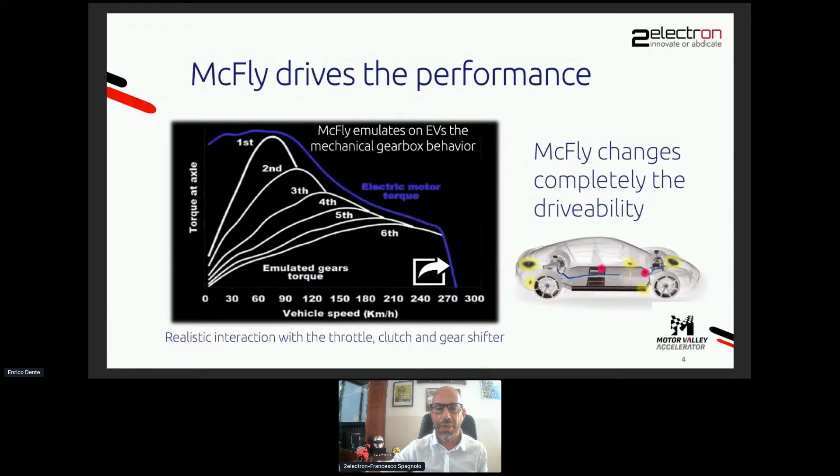Today we have our controller and real-time software engine cross-platform, international IPR, and the 2-wheel POC Emula already track tested. We are looking for tier 1 industrial partnership, networking, and seed investment. Our short-term goal is to produce 2- and 4-wheel street-legal customer POCs. In the medium term, the pilot project in an industrial environment, SIL assessment, and homologation.

I want to leave you with this final thought. People who love to drive need emotion. We are a Motor Valley Accelerator company that thinks about sustainable mobility, but with a big smile.

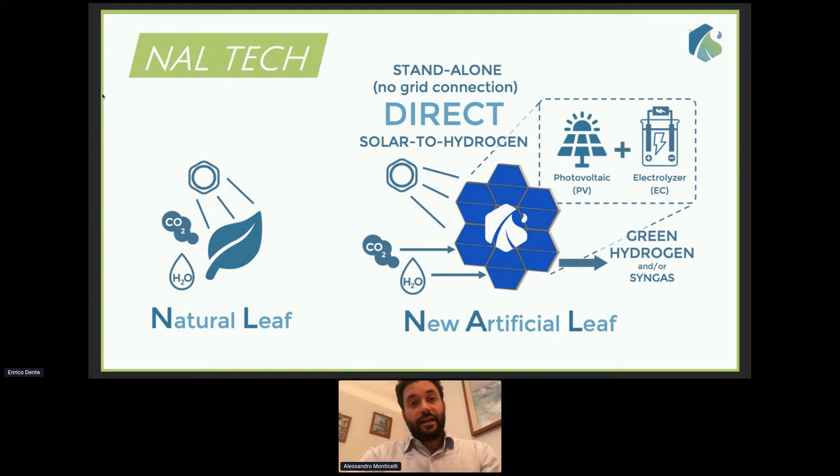Next slide, please. So what are the three main features that we have in our technology compared to the other ones? We do, as I said, direct green hydrogen. We have secondary products such as the recycling of CO2 emissions, and we are a standalone device that can be applied where photovoltaic panels and electrolyzers mixed together cannot be installed.

Next slide, please. So we basically solve the two main problems of energy in just one device. We solve solar intermittency through green hydrogen storage, and CO2 emissions with their recycling.

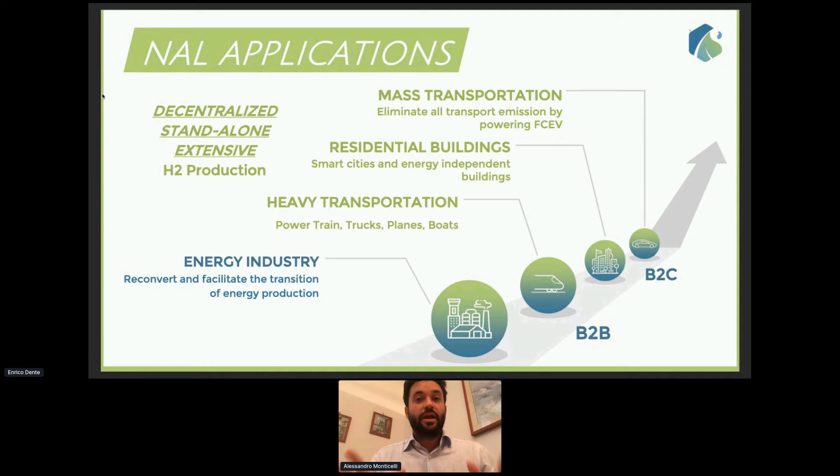Next slide. Our application starts from the B2B market, so from the energy industry. We take the energy industry and we renovate the existing infrastructure into green ones without destroying them, and we can move also to B2C markets such as transportation, residential buildings, and mass transportation, all because we have an unfair advantage, which is the fact that we are a standalone and extensive solution.

Next slide, please. So we can be integrated along parking lots, refueling stations, naval docks, railways, and gas pipelines. That's our unfair advantage. Next.

So what about our technology? We started at University of Illinois in Chicago with a POC. Then we moved on to Polytechnic of Turin with a functional prototype. And with the support of SNAM, we validated our technology at TRL5. And now we need to move on and reach a 15 to 25% solar-to-hydrogen efficiency and a levelized cost of hydrogen of €2 per kilogram of hydrogen produced. This is our goal. This is the next 2.5 years in front of us.

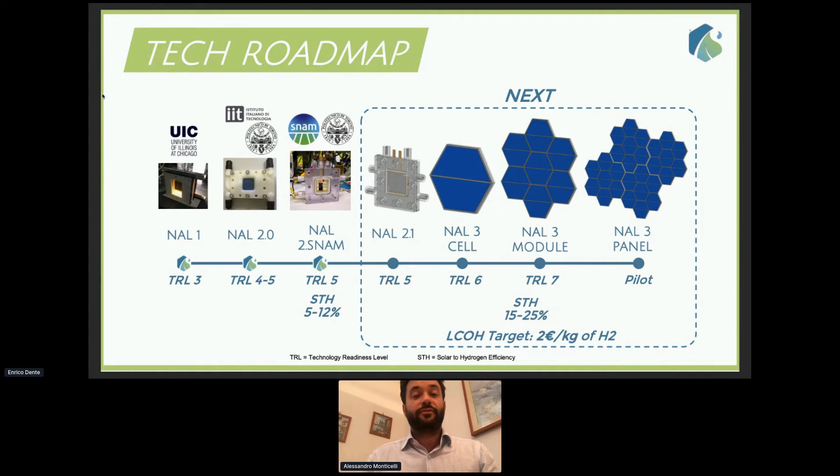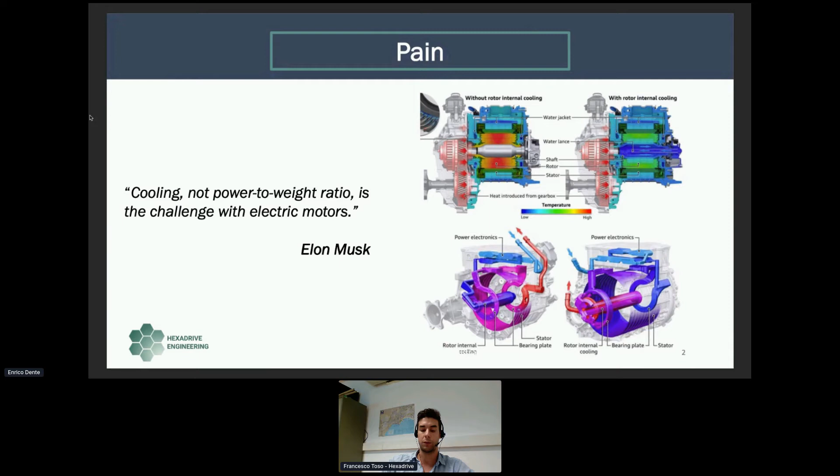Further, to develop semi-reliable thermal models, standard techniques require a lot of time, high-skilled personnel, many commissioning experiments, and multiple thermal sensors implemented in the stator, which increase manufacturing costs. Next slide, please.

HEXADRIVE digital twin technology outperformed the state of the art. We introduced MotorTWIN, a software to quickly and automatically develop digital twins of electric motors. Our software uses a hybrid approach, both based on physics systems and artificial intelligence. It's an easy-to-use product whose digital twins are characterized by unprecedented real-time model execution speed, holding a high level of accuracy.

Next slide, please. Once created and connected with the real motor, the digital twin enables the following disruptive features. First, you can use it in a simulation environment, testing your virtual prototype with many different drive cycles. Then, once your design is complete, you can deploy the digital twin directly into the embedded hardware which controls the machine. This allows implementing model predictive control for optimizing the cooling system and monitoring the rotor temperature in real time using the digital twin as a soft sensor, decreasing the number of sensors needed in production.

Here we have a practical example of our demo showcase. We use digital twin directly at the electric motor drive level. So you can better estimate in real time the torque, run the motor cooler, and save up to 14% of the battery, extending the range of the vehicle without any additional hardware. Next slide, please.

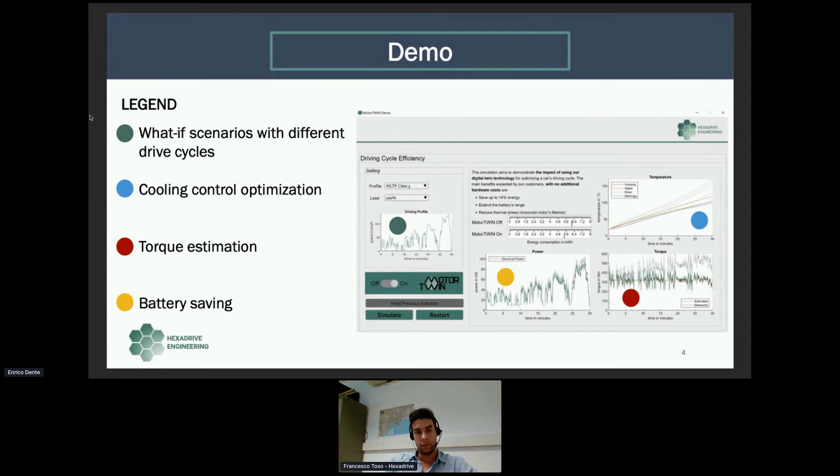Make HEXADRIVE your industrial partner to explore the world of digital twin. Thank you for the attention.

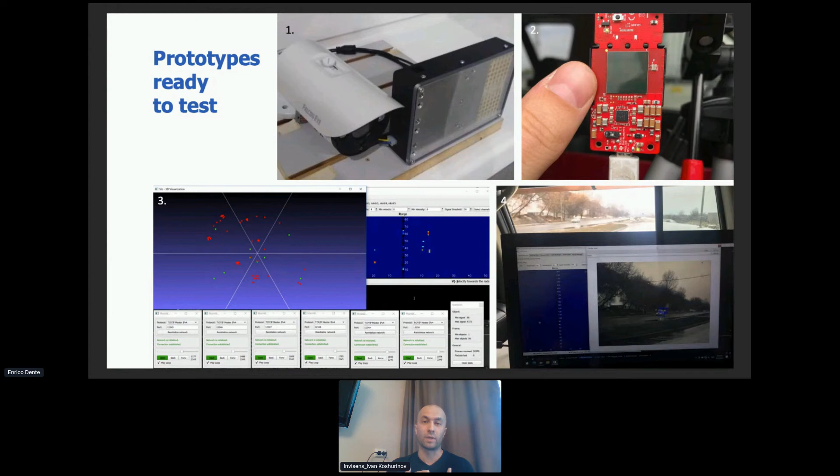Next, please. As you see, we are focused on the low-level software, but able to build the entire radar and ready to start pilot projects this year. Please reach us if you are a Tier 1 or Tier 2 OEM supplier to know how your ADAS system can benefit from low-cost radars. Or if you are a sensor fusion or radar developer focused on high-level processing or radar architecture in general, we can collaborate. Let us suggest the data acquisition and processing pipeline that fits your approach. Looking forward to hearing from you. Thank you.

Thank you, Ivan. So I see one question here. Who are your more direct competitors?

Oh, thank you for the question, love it very much. In fact, I'm doing an annual radar startups review, and there are more than 25 radar startups in the world right now. I'm publishing it to the Microwave Journal. Speaking about the approach, I know no companies that are focused on this particular niche of low-level software. For example, companies like Uhnder or Arbe, they are developing state-of-the-art hardware. Or companies like, let's say, Zendar or others, they are focused on AI processing. I cannot tell you the exact company that is focused on this particular niche of low-cost applications. So I was trying to find it for more than 5 years.

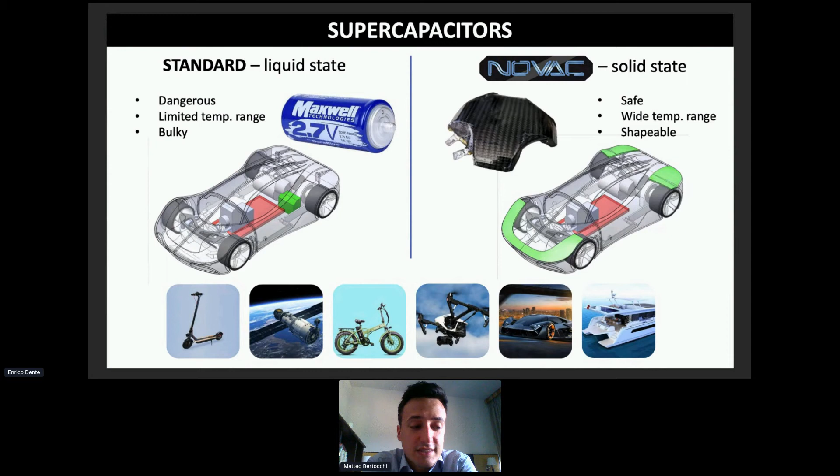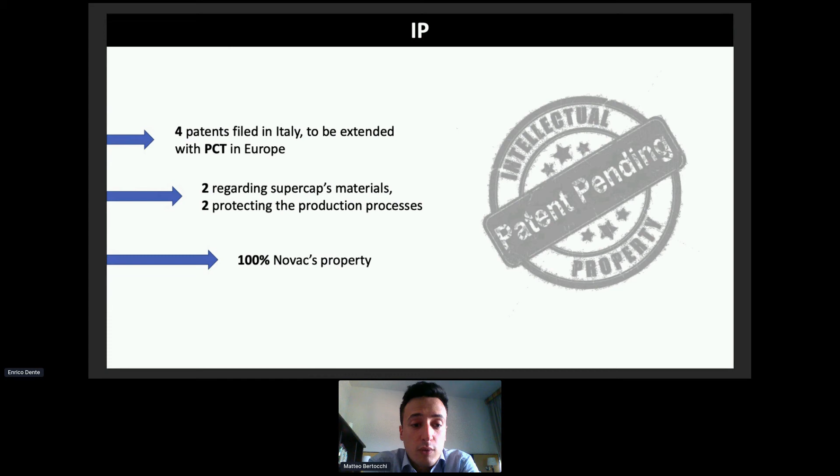We have already filed 4 patents in Italy, completely held by us. 2 regard the supercapacitor materials, while the other 2 regard the production process.

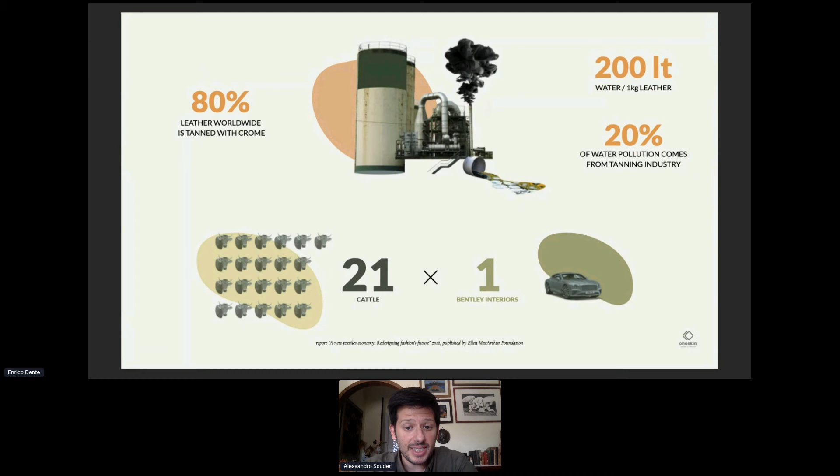And consumers are more and more concerned about it. Searches for vegan leather have increased by 119% in 2018, and vegan leather will total $85 billion by 2025, with the biggest part taken by the automotive industry.

For this reason, we patented a circular economy process through which we can transform byproducts of oranges and cacti from the food and cosmetic industries into a new luxury material comparable to luxury leather. We sealed industrial partnerships with Italian giants in the transformation of agricultural biomasses and plastic material production, and through these partnerships we produce at an industrial scale and are ready to scale up.

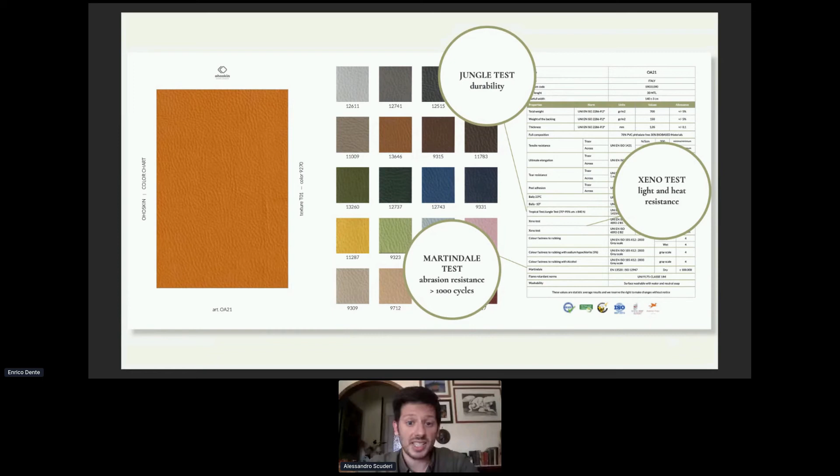Ohoskin is more durable than PU-based synthetic leather, which is subject to hydrolysis. It uses phthalate-free PVC that complies with EU REACH and USA's Proposition 65 rules. Its durability and resistance to abrasion, light, and heat are comparable to real leather, as proved by Jungle, Xeno, and Martindale tests respectively. But unlike leather, Ohoskin does not require any animal part in any part of the process, and it is fully customizable and far more sustainable.

So we're looking forward to hearing from car makers and dashboard suppliers who can contact us at info@oskin.com. Thank you for your attention. I'm available to answer your questions. Thank you very much.

Do you have samples available? Yes, we have, and we are also setting up our website, and we will be able to sell samples within, I hope, days. We are also available to hear questions and inquiries and to send some samples to you.

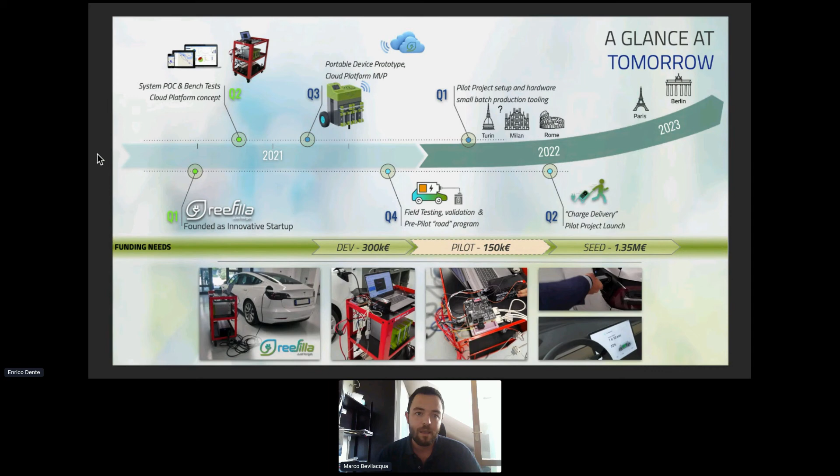We are completing our prototype phase. In parallel, we are looking for capital to complete the development and be ready for the pilot project of the charge delivery program that is targeted in the first half of 2022. Then we have clear plans to scale through franchise partnerships and expand to major European urban environments, obviously not limited to Italy.

The worst error we can do now, more than ever, is continuing doing as we have always done. We are looking for partners to build a new way of experiencing electric mobility by forgetting to recharge. Make the world a more silent and greener place with Reefilla.

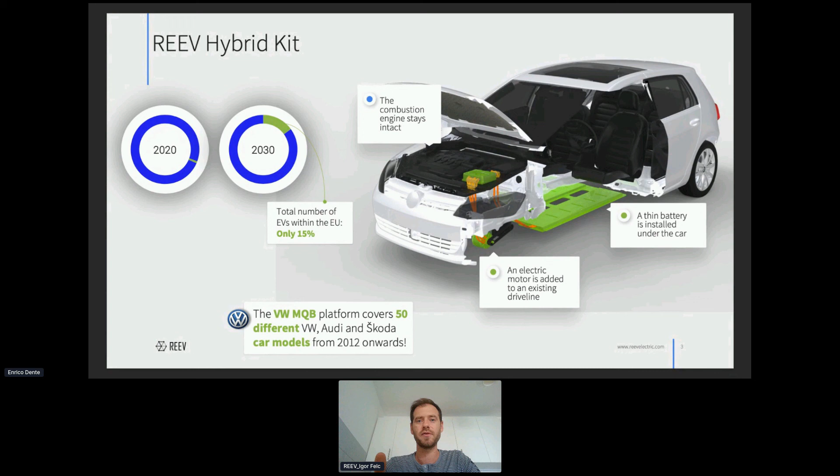Thank you, Igor. Questions? Okay. Wow, a lot.